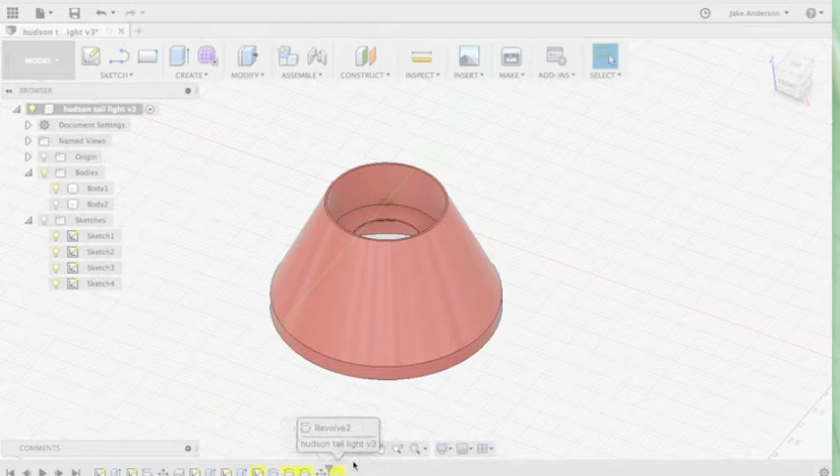The sketch that it's attached to, so roll history marker here, so it'll show exactly what was transpiring at the time when I was working on that particular piece. But anyways, here is the finished design. I've got it colored red because that's what I ended up 3D printing it in. But I'm just going to roll the marker back to when I first started, and right here you just have yourself a blank canvas. And what I did is I just picked a plane to start drawing on.

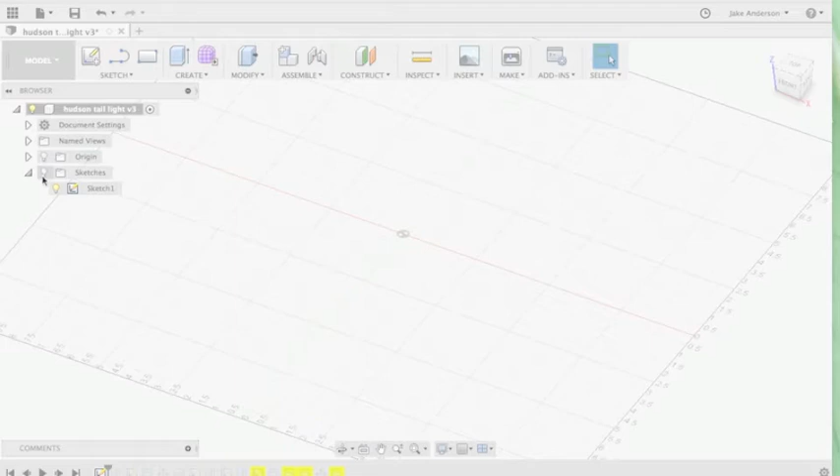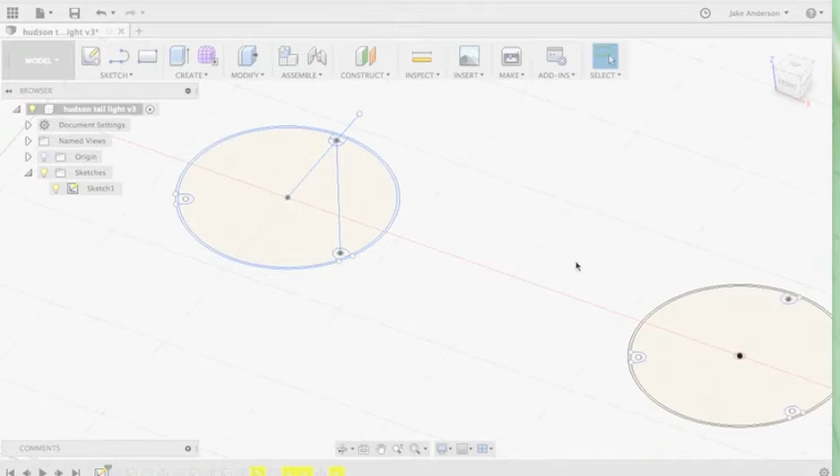And a little note here, all these bulbs on the sides are to show the visibility. So the bulb for sketches in its entirety was unclicked. So no matter what, you wouldn't be able to see any sketches, even though the sketch 1 light bulb was clicked on. And vice versa. So right there's my original design when I started taking measurements off of my parent part. And over here was another one I was fussing around with, but primary focus is going to be over here on this one.

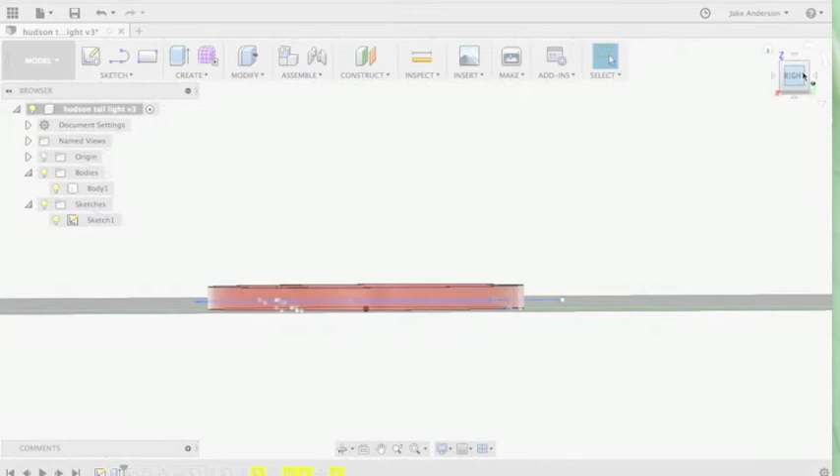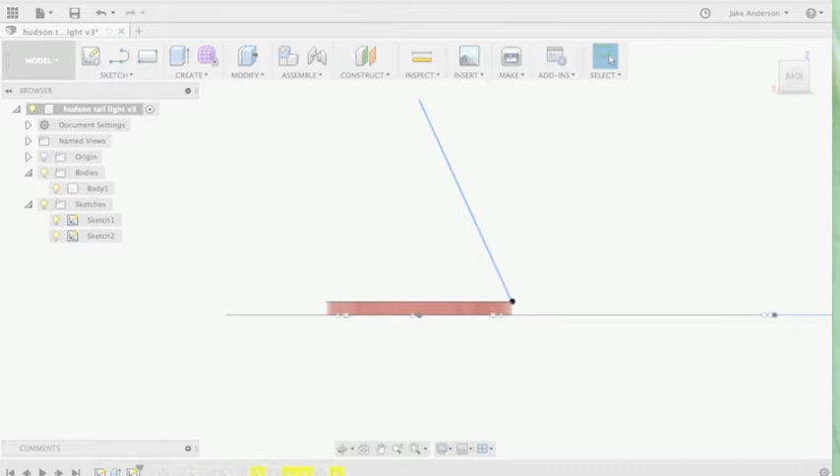And so the next feature is the extrude. And what I did here is I just set it to create an object at a certain thickness. And the navigational cube's really nice. There's different portions you can click on to get different views, and it's really helpful. But you can free scroll it and all sorts of stuff like that. So from there I went and drew another sketch, and what I did there was I began the nose cone, and then moving on. So this is a function that I really like. This is revolve, and you can use sketch geometry just like what I had there, that single line, and it will create a solid body out of it.

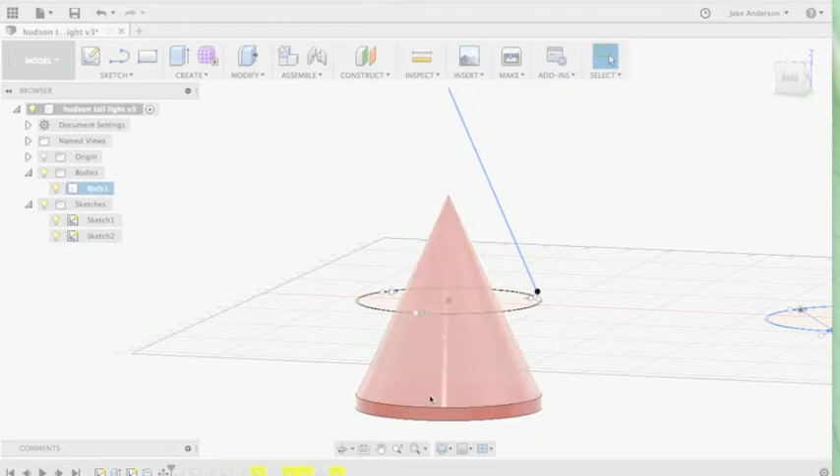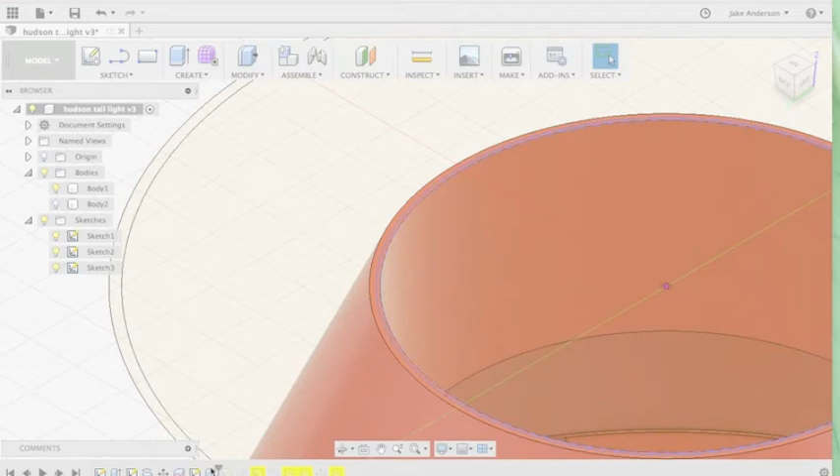What I did here is, because I'm eventually wanting to create 2 different angles, I moved the body down, and then the next tool here is the split face. So pretty much just chop that off right there using this plane as a cutting tool. And another sketch. And really that one's hard to see. It's just a little bit smaller circle right there. And then I extruded that as well. You can see it a little bit better from underneath. So that's the little recession that I have in there.

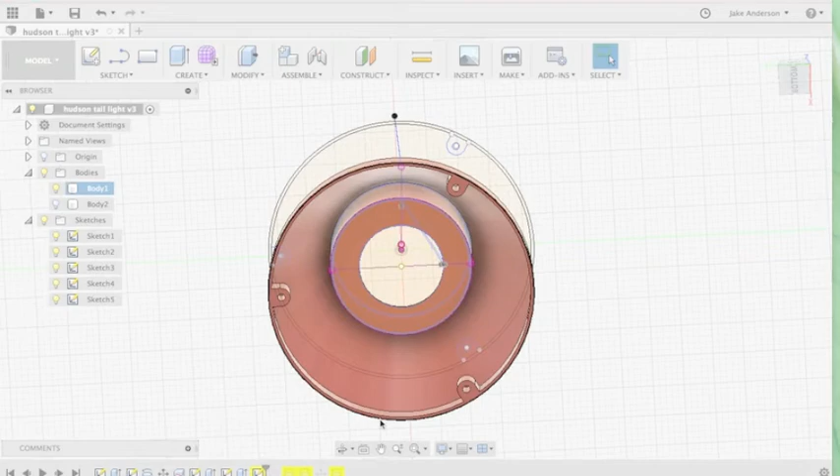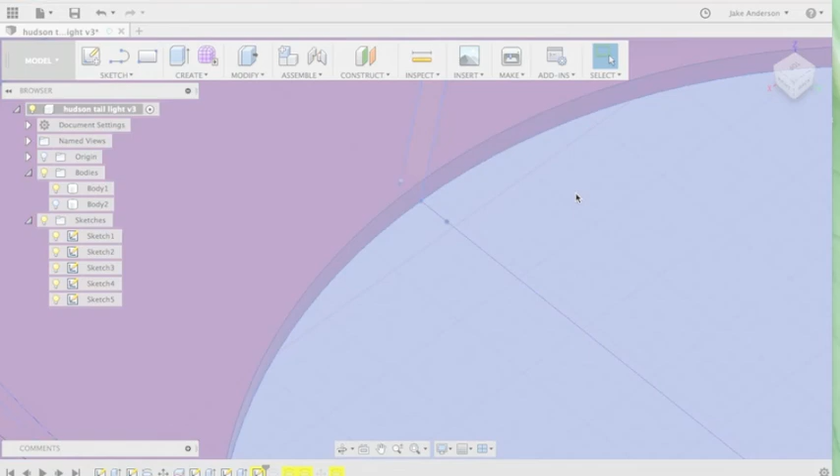And then another sketch. Bada bing. And so right there, this will be solid. This is going to taper up into the nose cone. Another extrude. Fill that body in. And then I'm doing some more sketching here. And so what I did is I grabbed this point way down in here, and the reason I did that, you can kind of see it hidden back there, is to give it a little bit of meat so it's back inside the material. And then revolve again, and there it is.

So kind of a quick, dirty explanation of the functions and processes that I used for designing this part in Fusion 360.